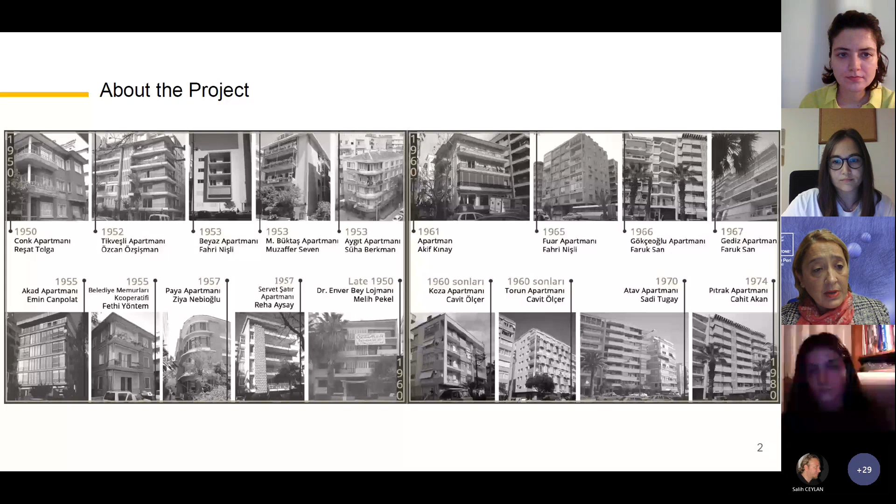In the project, we discussed the apartment buildings in the Aksoy and Donanmacı neighborhoods, which are regions where transformation is very rapid and which contain the characteristic housing structures of the period. We determined the historical range of the research as 1950 to 1980, taking as reference the historical processes, breaking points, and developments thought to be important in apartment architecture.

In the next slide, we will see the selected apartment blocks. In the case study, we chose the buildings of Akif Kınay, Armağan Çağlayan, Cahit Akan, Faruk San, Kemal Türksenmez, Semih Aygın, and Ziya Nebioğlu, who produced quality apartments in Karşıyaka during this period.

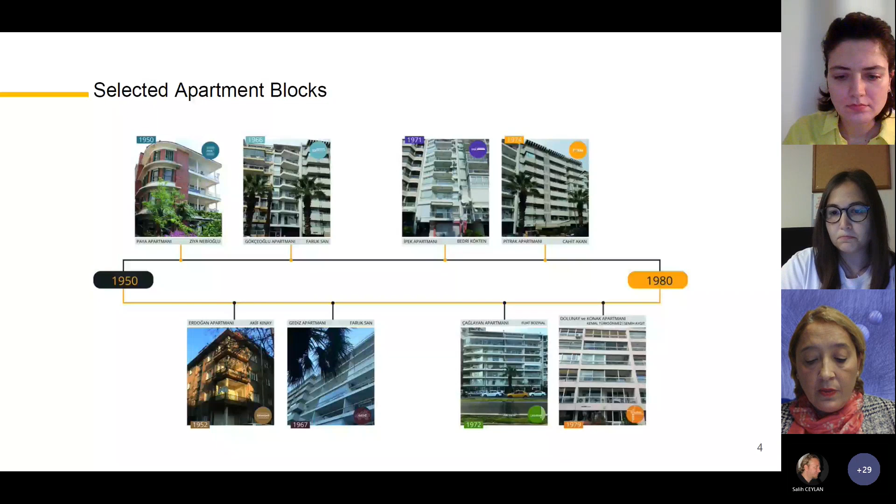The selected apartment blocks are Paya, Erdoğan, Gökçeoğlu, Gediz, İpek, Çağlayan, Pıtrak, Dolunay, and Konak, which were built between 1950 and 1980.

I want to mention the reasons for choosing Karşıyaka as the project area. We can list these as follows: the lack of studies about housing architecture and interiors in this district, the limited studies on Karşıyaka housing architecture compared to other regions in Izmir, and the rapid transformation of existing multi-story houses due to the effects of the urban transformation law.

Another reason is the diversity of qualified apartment buildings that need to be documented and analyzed. And apart from these reasons, after we started the project, the earthquake in 2020 also affected this rapid transformation.

Specific criteria valid for all selected case study buildings are listed as follows. We selected the buildings according to these criteria. The first criteria is having been built in the period of 1950 to 1980, when the formation of new multi-story housing intensified due to the change in the process of defining apartment houses as property housing in 1954 in the land registry law.

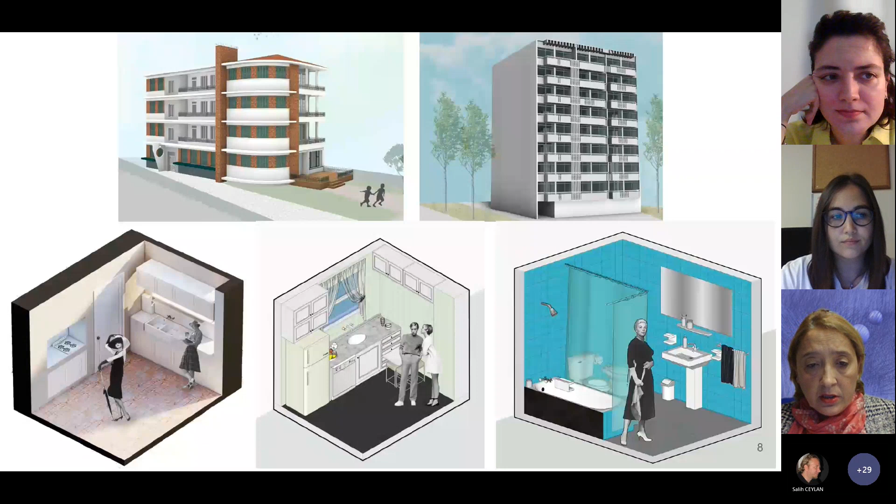Apart from the photography technique, which is one of the main image-based techniques, we use 3D architectural modeling and visualization and rendering methods. Here you see some examples of these methods.

And for a detailed study, we chose Rhino, a CAD/CAM software designed for 3D modeling and prototyping. With Rhino, we completed detailed models of the exterior, interior, and furniture of the apartments selected within the scope of the project. We used Rhino's rendered viewport and Twinmotion for visualization of the architectural models.

We prefer to produce it as a white model in order to make the buildings, furniture, and three-dimensional interiors more easily perceived by the audience.

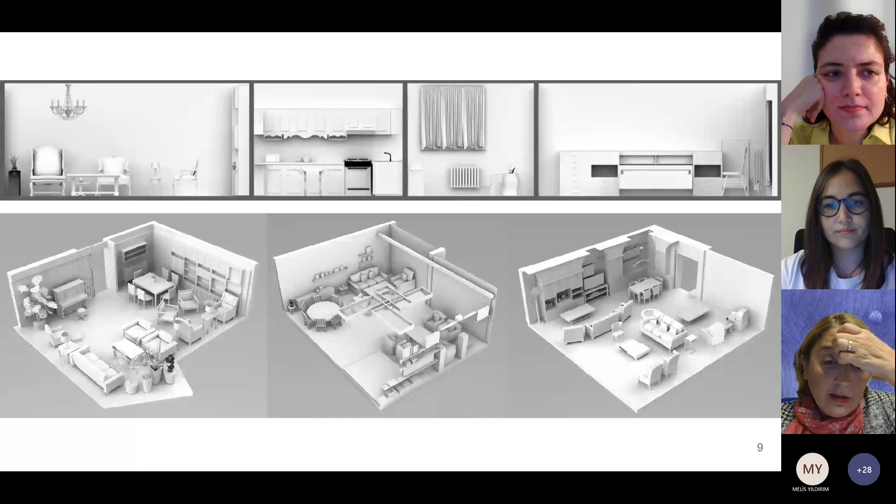Within the scope of the project, oral history interviews were conducted with different people, such as flat owners, architects, architect relatives, furniture artists, painters, city planners, and ceramic artists at different times. During these interviews, written, visual, and verbal information was obtained that would contribute to the project.

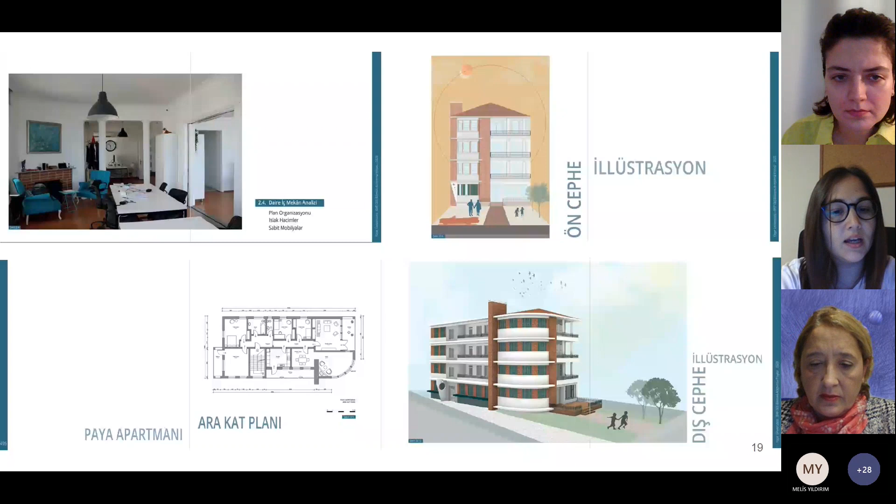The website and the e-catalog are the main outputs, but we also designed social media accounts to make the project more visible. To increase all accounts' visibility, we created a Linktree link.

I also shared it from the chat part: Linktree, İzmir Kent Belleği. The main social media account that got the best attention and interaction is our Instagram account, followed by Facebook, Pinterest, and Twitter accounts.

Under each post there is also textual information regarding the apartments and interiors, general characteristics and properties. All apartment blocks that were studied can be found in our social media accounts.

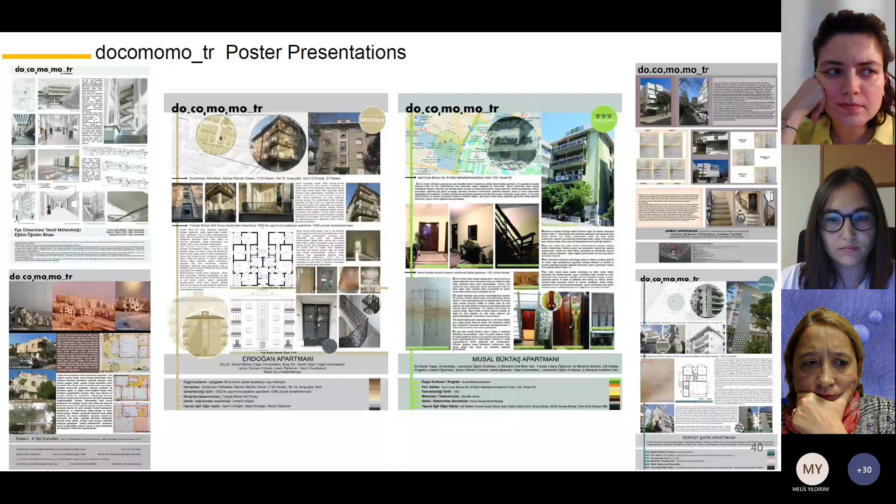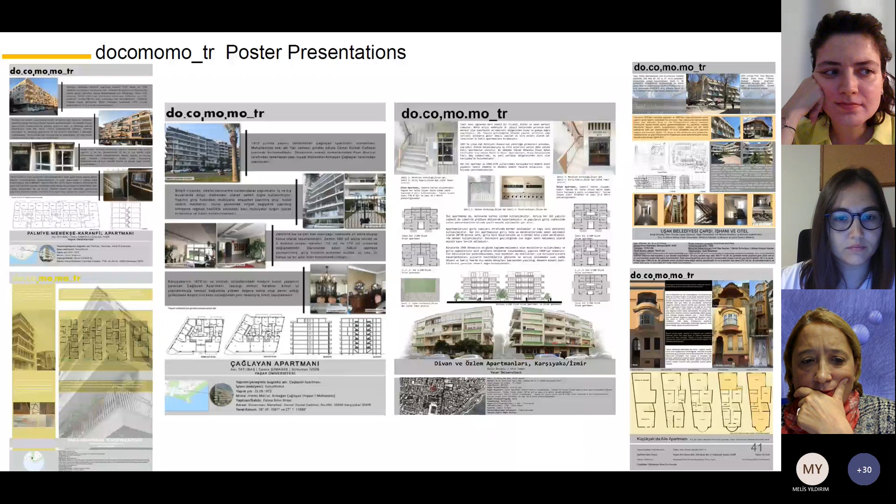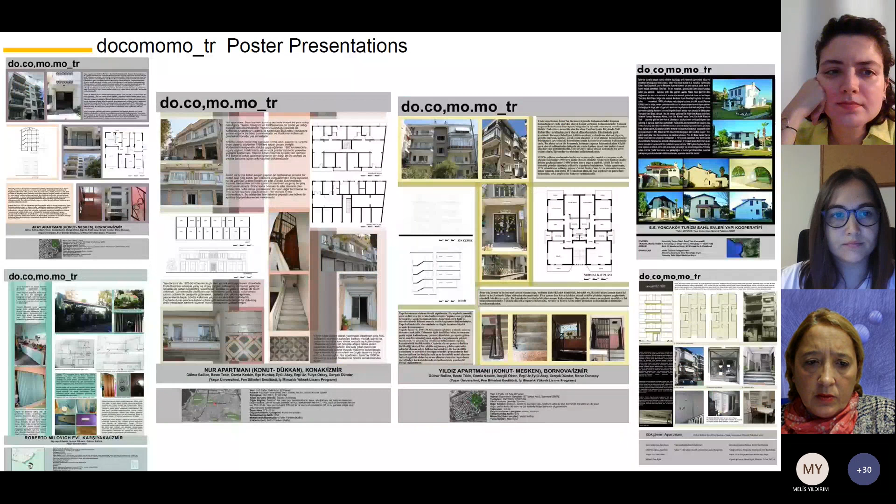Although this project is specific to apartment buildings in Karşıyaka, Izmir, we include different building types within the scope of modern heritage spread around Izmir from a broad perspective in our research. In this context, we try to participate in the Docomomo Turkey poster presentations every year with different building types. The main aim is to focus on undocumented examples of 20th century Turkish architecture and bring them to the literature, so it's very important to document structures that can be evaluated within the scope of cultural heritage without being destroyed, and to share them with researchers in the discussion environment.

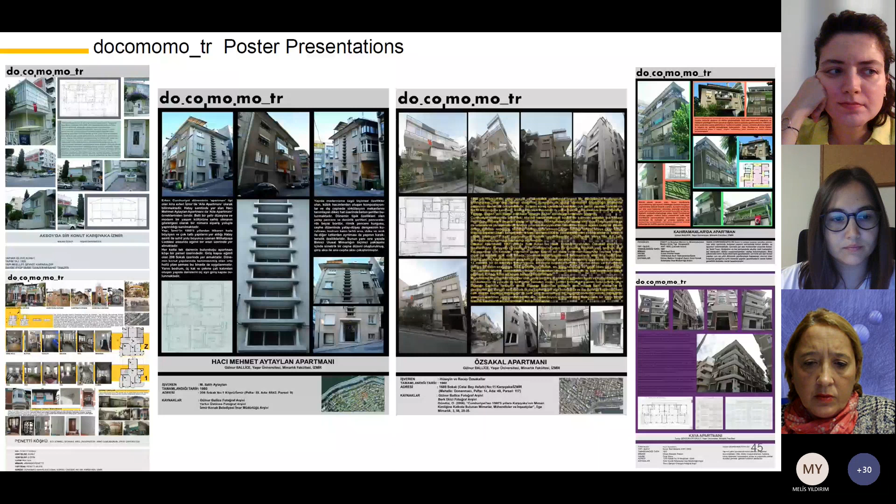Along with the prepared poster and oral presentation, detailed information of the structures discussed is documented and can be transferred to large audiences. The data obtained during and as a result of this research project contribute to the development and renewal of course content, including in the undergraduate and graduate curriculum of Yaşar University's Interior Architecture and Environmental Design Department. The project is thought to contribute to both the education of Yaşar University Faculty of Architecture students and the enrichment of other universities' course content on this subject, in terms of educational material and creating a new method.

In connection with this subject at Yaşar University, there are elective courses, including one undergraduate and two graduate courses. Within the scope of these courses, various readings and research are made and discussions about housing culture are carried out. In addition to theoretical knowledge, students are asked to document the architectural heritage of Izmir. The urban, architectural, and interior design features of Izmir are transferred to digital media in 2D and 3D ways. Students ensure that transforming or lost values are researched, analyzed, rediscovered, and documented.

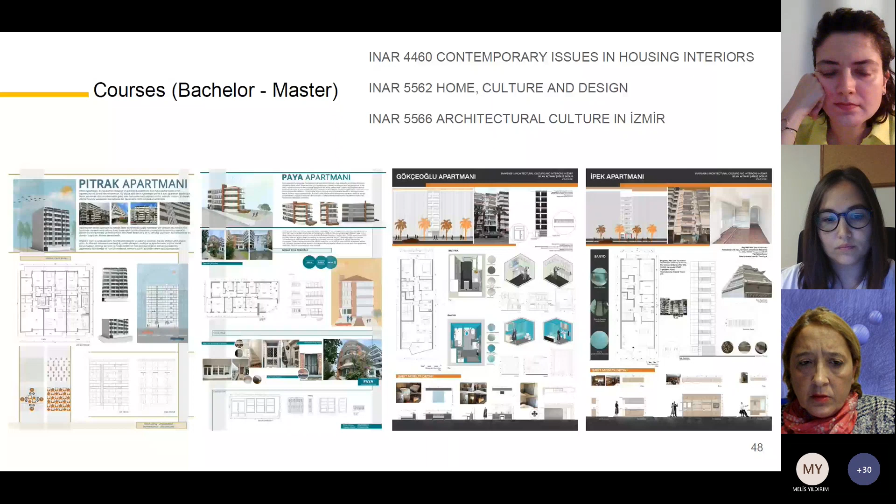Various master's theses were completed before and during the project. Within the scope of the thesis titled Facade as Urban, Architectural and Interior Element, Interpretation of Tangible and Intangible Values in Izmir Karşıyaka Apartment Blocks between the period of 1950 and 80, the modernism period of Turkish architecture history has been read through residential facades that contain information about the society, region, period, lifestyle, social, cultural, political, economic values, and architectural approach. In this context, to analyze the residential facades from different aspects, 6 apartment blocks from Karşıyaka Donanmacı district were studied in detail, which have significant characteristics in terms of architectural and interior features.

The research is also supported by analysis of tangible values obtained as a result of objective data, and intangible values resulting from subjective interpretations, specially developed and proposed for residential facades. The proposed tangible and intangible values analysis provides a comprehensive evaluation of 6 housing facades selected from Izmir, Karşıyaka. This thesis contributes documentation containing information, references, and hints on housing facades by investigating housing policy, design culture, and architectural and interior space developments in the Izmir Karşıyaka region.